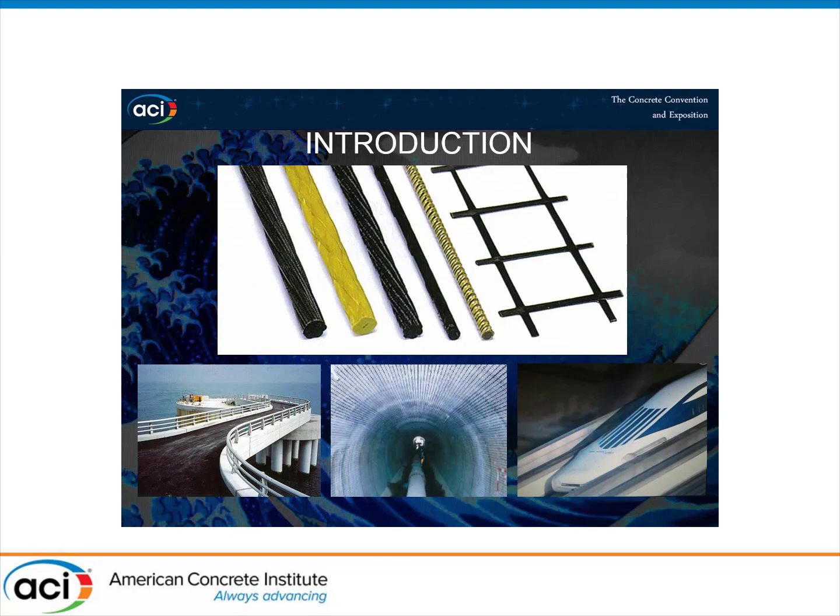Fiber reinforced polymer FRP bars have attracted a lot of interest as an alternative reinforcement material for concrete structures due to their high strength, lightweight, non-magnetic nature, and corrosion-free properties. Since 1988, FRP has been used in over 500 structures throughout Japan and more in the world for reinforcing materials.

However, it has been pointed out that the bond between FRP and concrete could be a potential problem due to the difference between the thermal expansion coefficient of FRP and that of concrete, and the fact that organic fibers are hygroscopic.

The objective of this study is to better understand the degradation over time of pretension concrete beams subjected to repeating drying, wetting cycles and variations in temperature under natural environment.

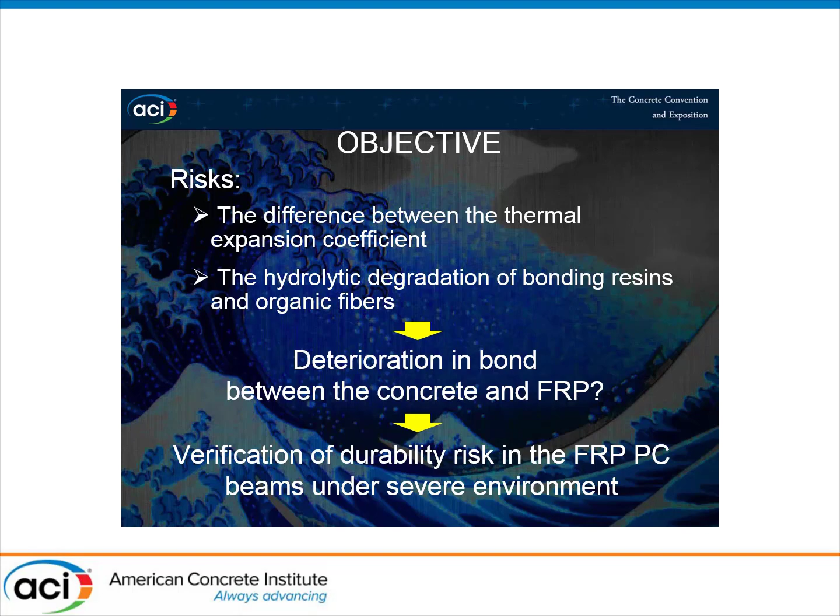This study has begun in 1997 at first planning production of specimens. Initial loading before exposure and beginning of exposure in 1999. And since then, 3 loading tests, initial and the second and third, and chloride ion inspections have been taking place.

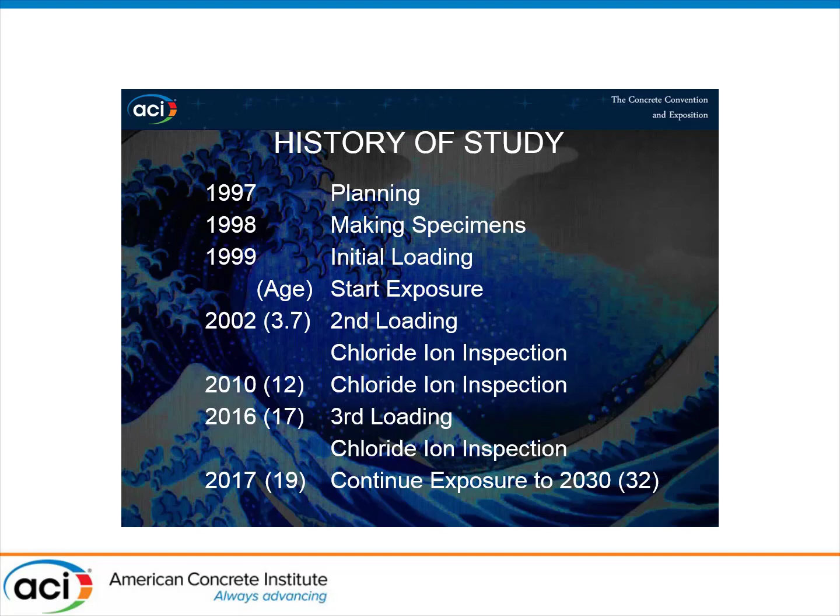The parameters of this study are the material of tendon, the exposure site, and the exposure time. The extent of degradation was assessed through static testing at the end of the exposure period, and observation of the onset of rusting in case of steel reinforcement.

The letter of ACS is a material of the tendon, aramid, carbon, and steel. Letter of IT is the exposure site. I is the splash zone, and T is the inland. Control 1, 2, 3 indicates exposure time.

Control is a non-exposure and destroyed at its age of 2 months before exposure. Number 1 destroyed at age of 3.7 years. Number 3 is destroyed at age of 17 years. And number 2 is still in exposure.

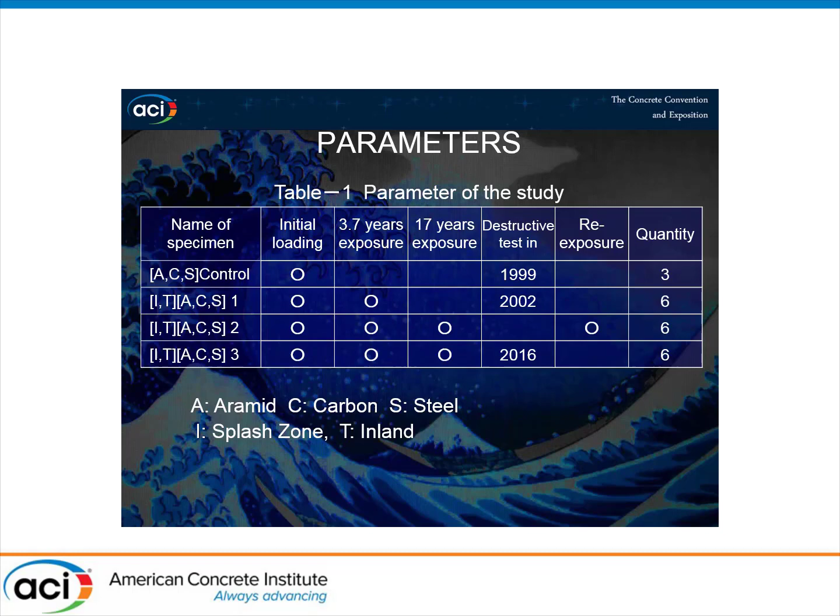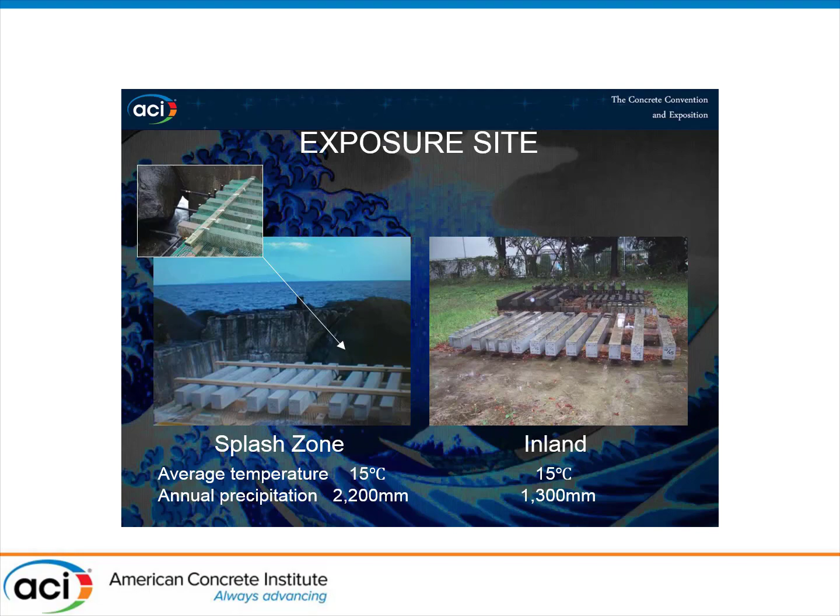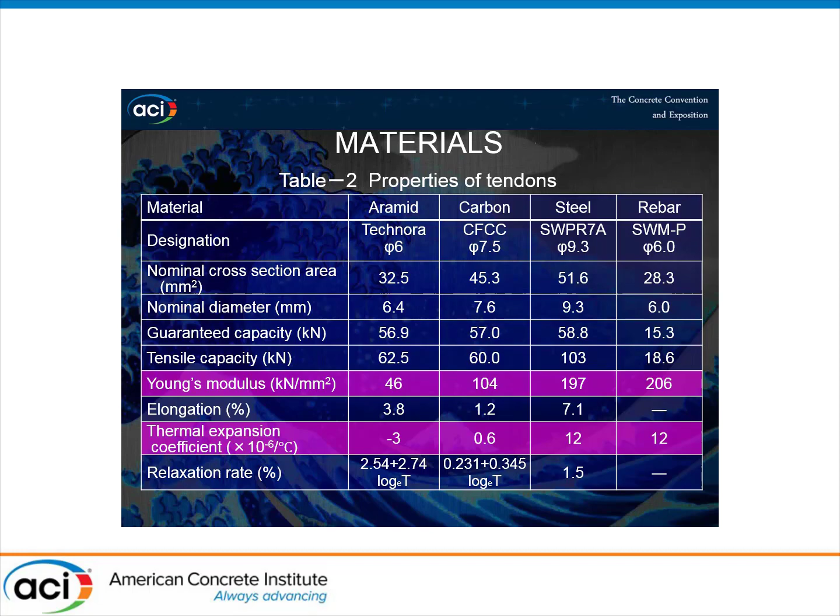At the age of 17 years, an average shrinkage strain of approximately 860 micro was observed.

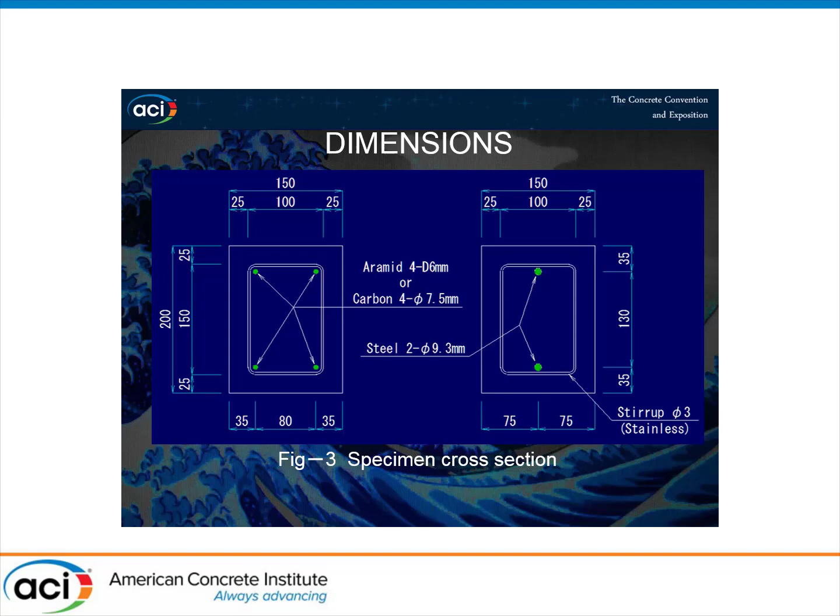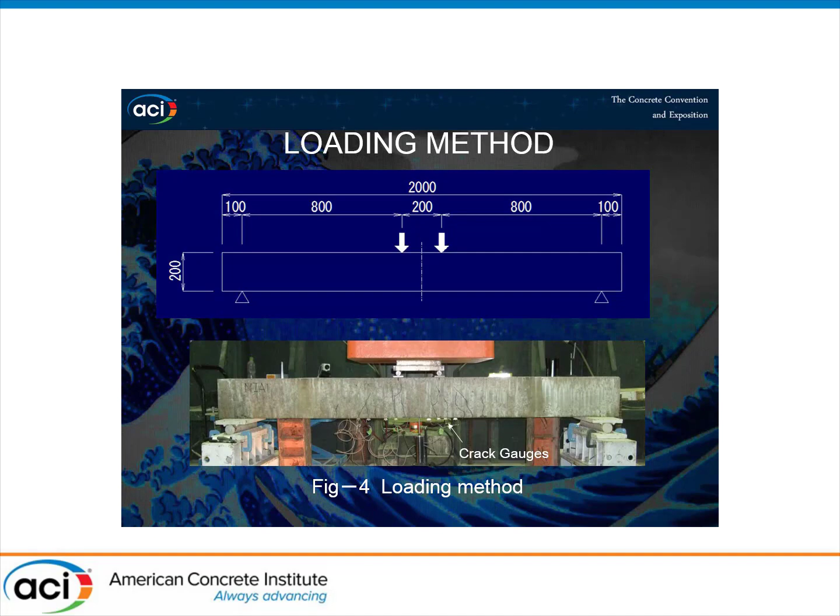At the age of 3.7 years and 17 years, a load was applied again. The crack reopening load was observed using crack gauges, and a comparison made with the pre-cracking load observed at initial loading test.

In case of steel, concrete failure after yield of tendon. These results were consistent with that of the FEM calculations by applying a fiber model using the concrete compressive strength with the age of 2 months and a tensile strength of the prestressing tendons.

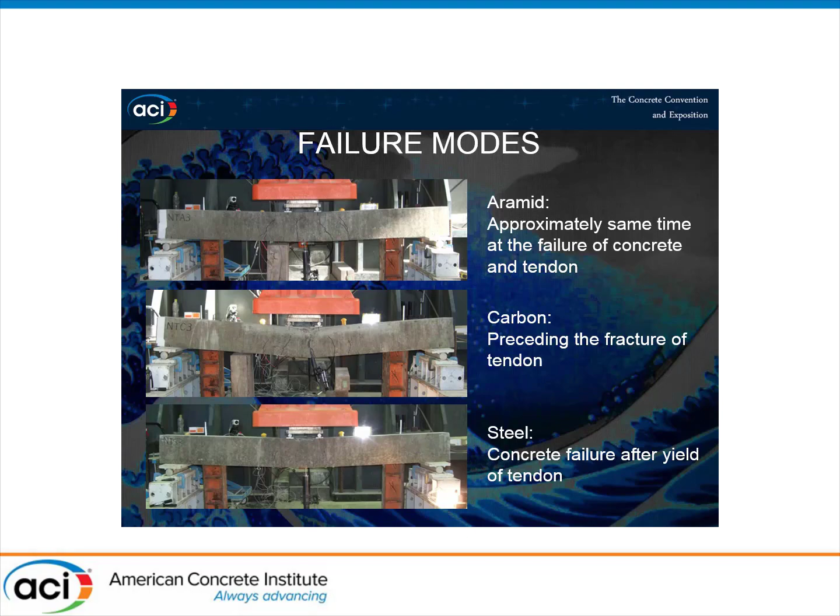To notice the flexural moment capacity, the values have no difference. They had a coefficient of variance less than 2%, and it matches nearly perfectly with the calculation. In other words, aging degradation caused by the sprays of seawater and temperature changes do not occur in 17 years.

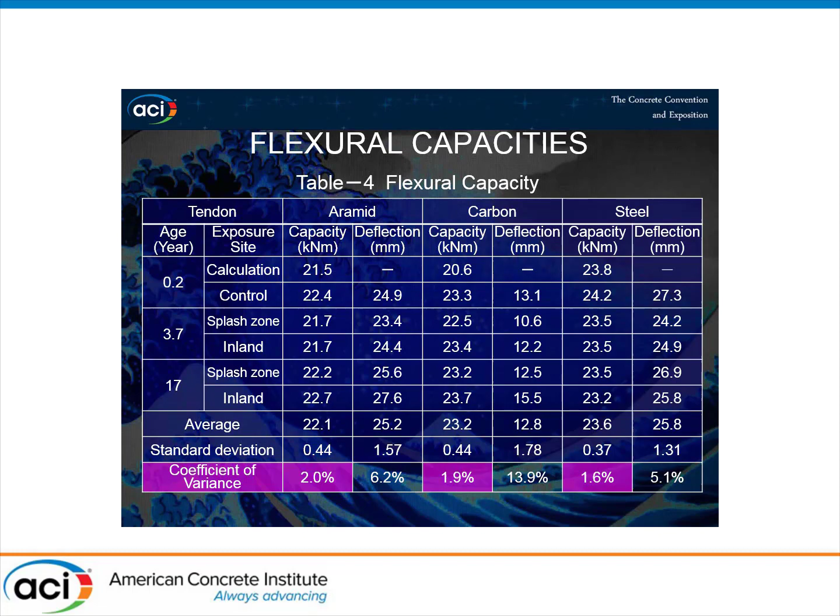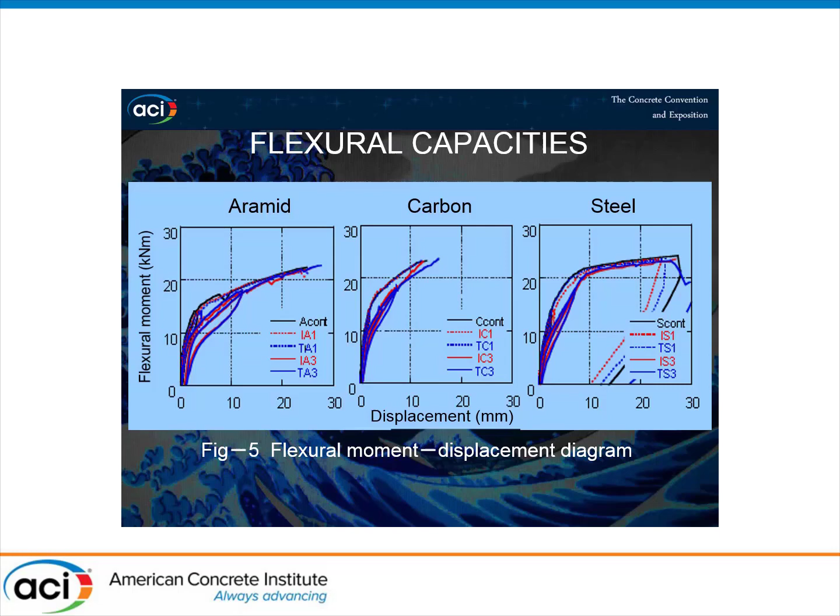This gamma is the apparent relaxation rate, including the environment of concrete shrinkage.

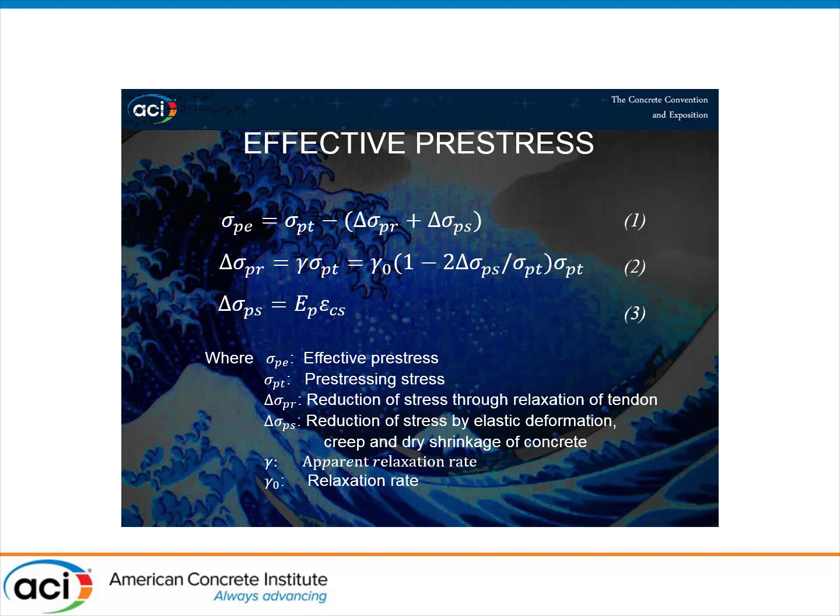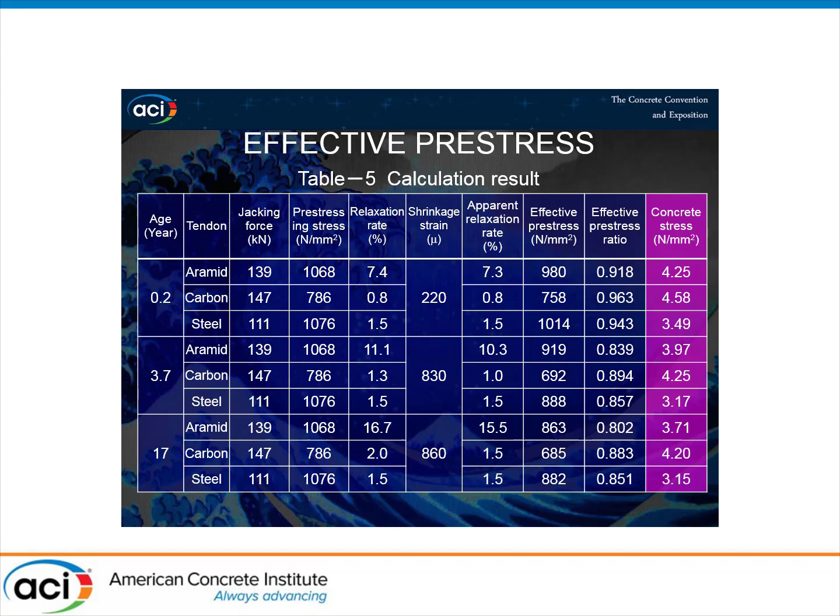The concrete stress by effective prestress were approximately 4 Newton per square millimeter, and cracking moment and crack reopening moment were back calculated using this value and concrete tensile strength measured at the age of 2 months.

The measured values were larger than the calculated value, and it became clear that the relaxation rate chosen for the material test was a relatively appropriate value for the specimen with long-term exposure.

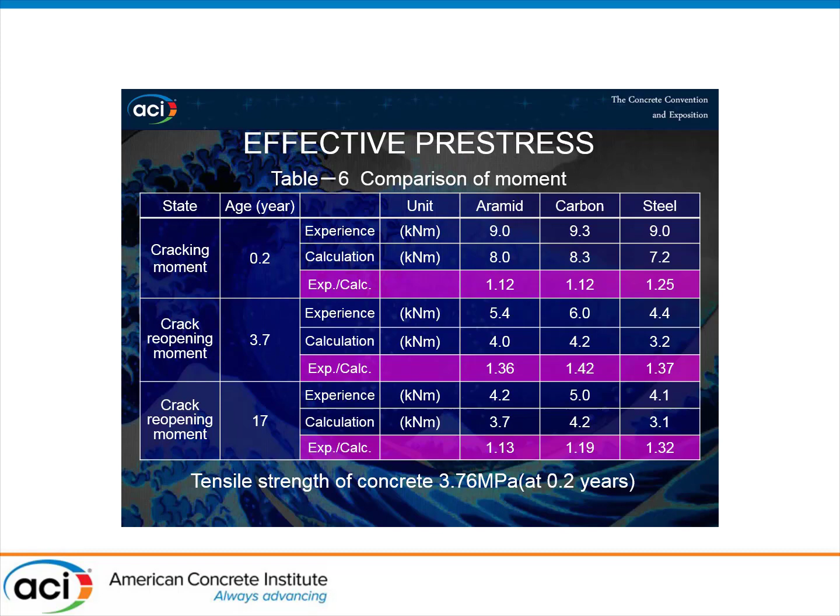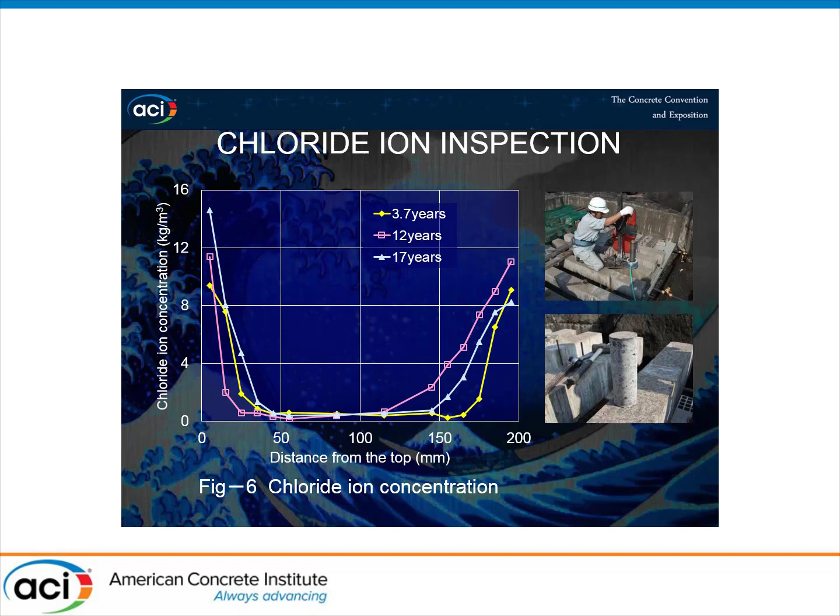However, during the demolition investigation, after failure following 17 years of exposure, almost no rust was found in the steel strand, and the structure can be considered sound.

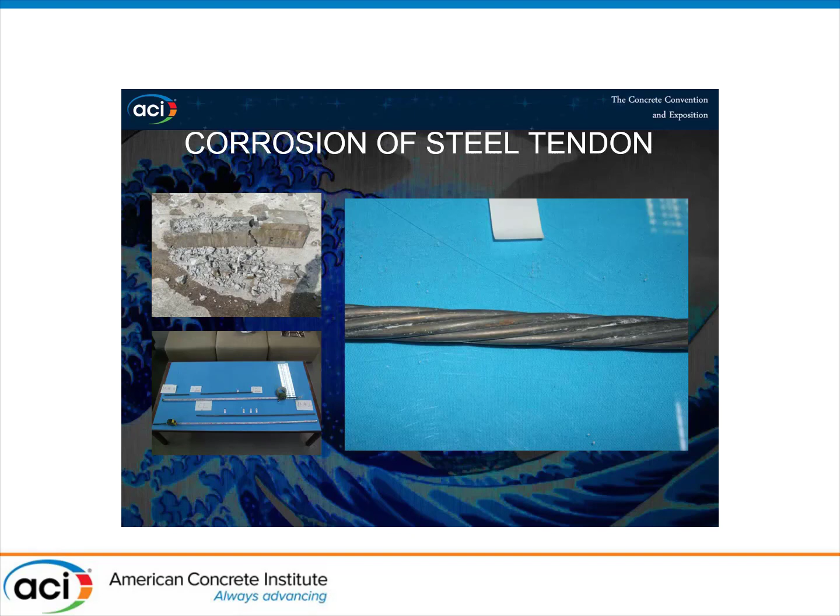Therefore, we decided that the remaining specimens will be exposed again in order to clarify the difference in durability between each material of the tendon, and the facilities at the shore side of back sea and inland, until the year 2030, at an age of 32 years.

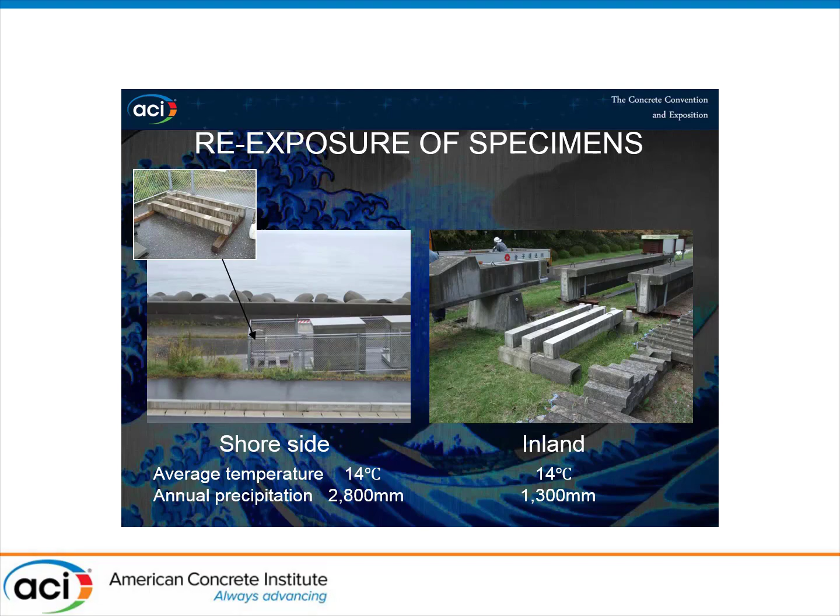And conclusion. In an effort to better understand the durability of FRP bar in a severe environment, a long-term study had been undertaken using tendons made of aramid and carbon fibers and steel strand in pretensioned concrete beams.

As a result, it was confirmed that there are no observable or detectable deterioration in terms of flexural capacity on account of 17 years of exposure. The pre-cracking of the pretensioned beams at 60% of flexural capacity does not have a negative influence on tendons exposed at the splash zone for 17 years.

Although it was assumed that degradation will occur when the steel strand is exposed to the splash zone after roughly 15 years, it became clear that if dense concrete is used, there is no degradation, similar to FRP tendons.

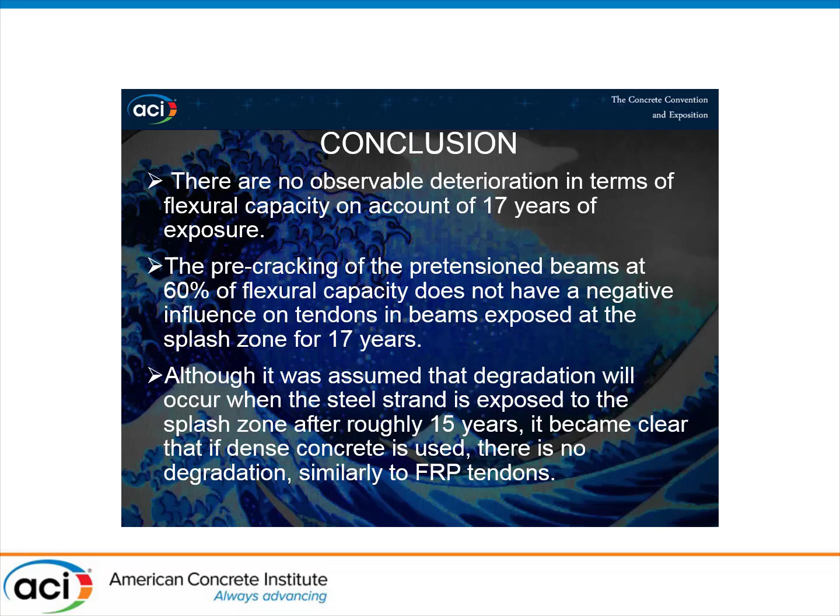Finally, this study was undertaken by the Institute of Industrial Science, University of Tokyo, through funding from ACC. That is all for my presentation. Thank you very much for your kind attention.

Thank you very much, very interesting study, very important study. One of your conclusions was very positive, that even after 17 years there was no considerable deterioration in pre-cracked members. We often relate deterioration and limit crack widths therefore.

So my question is, I apologize if I missed this data. Did you have also measurement on crack widths? So you mentioned that elements were pre-cracked. Did you have measurements on crack widths? What widths of cracks?

I think in this study, crack-wise, average crack width is 0.5 millimeter for aramid and 0.3 millimeter for carbon and steel at 60% of flexural capacity. With aging, the crack width shows no changes through many times of loading.